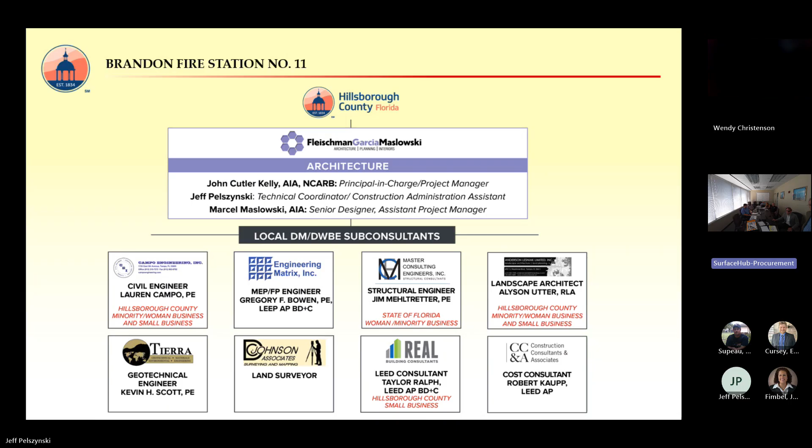You're already familiar with our project organizational chart. The key item on the chart is absolutely every firm on this chart has done fire station projects previously, so it's a highly experienced team. One thing that's a little bit unusual about us and sets us apart from other firms is we are currently celebrating the 25-year anniversary of our first fire station for Hillsborough County Fire Rescue, which is indeed fire station number 11 in Brandon. 2 of the firms that we work with on that job, our mechanical electrical engineer and our construction cost estimator, are also part of our team on this project.

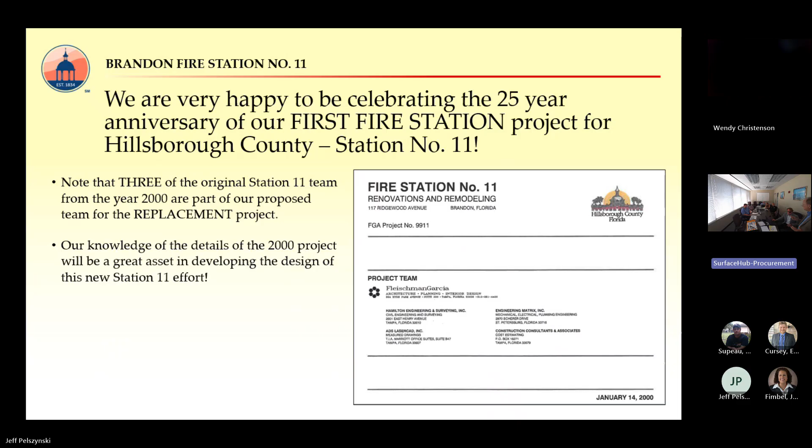And we feel very strongly that our knowledge of Fire Station 11 from that 25-year-old project has contributed greatly to our understanding of some of the issues you've got to address for the current project to be a success. First thoughts. Here are 3 key things that are going to drive the progress of the design and drive the cost of construction. Fire Station number 11 has to remain fully operational throughout the construction of a multi-million-dollar project on a constricted suburban site. We're going to present in detail how we think that can be achieved in a logical phased manner. The 3,360 square foot apparatus bays are to be retained and renovated.

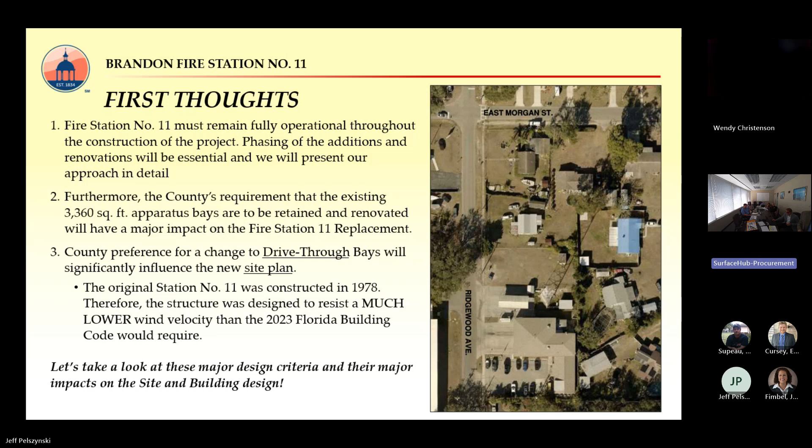Let's keep in mind they were designed in 1978 when the building codes were far less rigorous than they are right now. And the county has also expressed a preference for drive-through bays. Converting from back-in bays to drive-through bays will have a major impact on the site plan of the station. So let's take a look at these 3 major design criteria and see what we make of them. In 1978, the design wind velocity was probably 110 miles an hour. It's now 154 miles an hour under the Florida Building Code currently in effect.

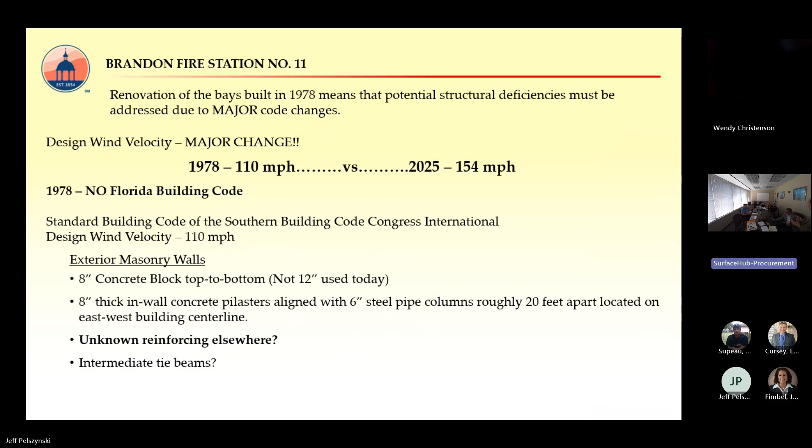The Standard Building Code of the Southern Building Code Congress is the one who set the 110 mile per hour criterion, and that would have determined how the masonry walls of the apparatus bays were constructed, how the roof was framed, and so forth. We don't know how those walls were reinforced. We don't know whether the 8-inch concrete block, we would use 12-inch today and always have in Hillsborough County, has been properly reinforced to take the wind load imposed by the much, much higher wind velocity.

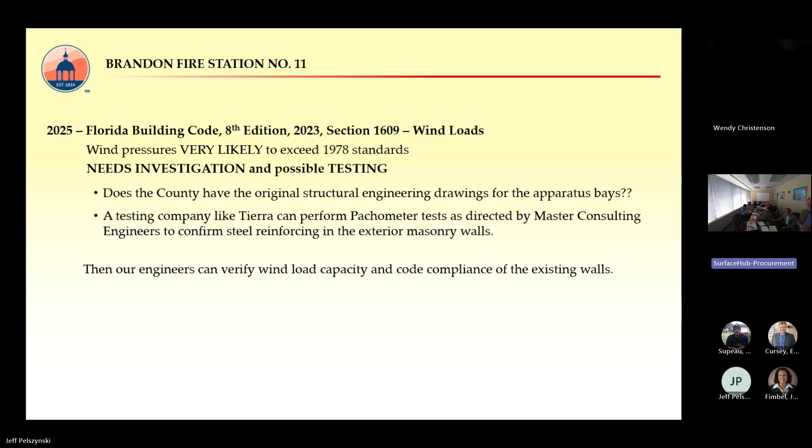The Florida Building Code and the implications for that wind speed increase have to be investigated. It would be wonderful if the county has the original structural engineering drawings for the building. I don't know if you do. Our project 25 years ago was essentially interior renovation and remodeling, fire sprinklering, adding a force main, getting rid of the leach field. Our testing company, our geotechnical firm, Tierra, can perform tests on those walls to see if there's proper reinforcing in them. We've got a lot of experience in hurricane hardening existing fire stations.

Some years ago, we did fire station hardening for 4 projects for Seminole Fire Rescue, and the one that was most similar in concept to yours was fire station number 31. It was built back in 1974. It was built using 8-inch thick concrete block walls that were unreinforced. Our structural engineers analyzed the wind pressures on the building and determined that major reinforcing of those walls would be essential.

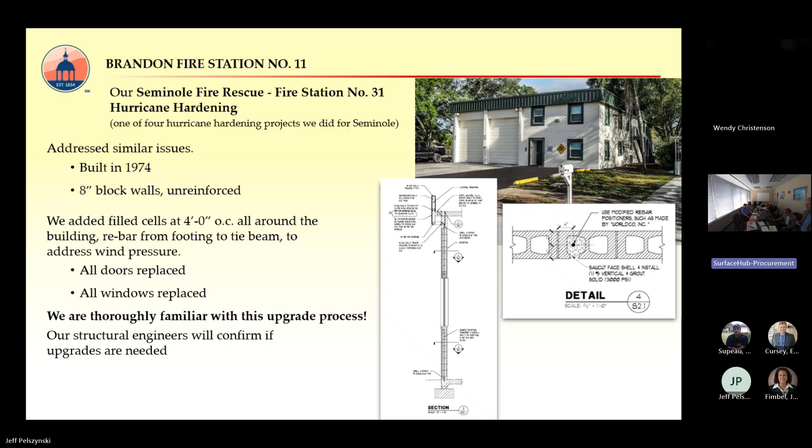What we did was we added filled cells at 48 inches on center all around the entire perimeter of the building. A number 5 bar was drilled into the foundation, ran all the way up the filled cell, and was drilled and epoxied into the tie beam. We cut slots into the concrete block, put the bars in place, and then filled the void with fine grout. We replaced all the doors and windows. So we're very familiar with the process that we think is pretty likely to be required if you keep that existing apparatus bay structure.

Another issue that we have to think about is the very unusual fact that this building was apparently originally built as a steel frame structure with steel bar joists and corrugated metal deck. And at some point in the life of the building, wood trusses were set down on top of the existing flat roof construction. An additional course of block was added on top of the existing concrete tie beam. And we don't know much about that block. We don't know if the blocks were filled solid. We don't know if they were doweled down into the concrete beam to hold them securely in place when they're subjected to wind load, or if they have simply been mortared in place, and we have no idea whether that existing beam would have been properly cleaned so that mortar would adhere and provide uplift resistance to the system.

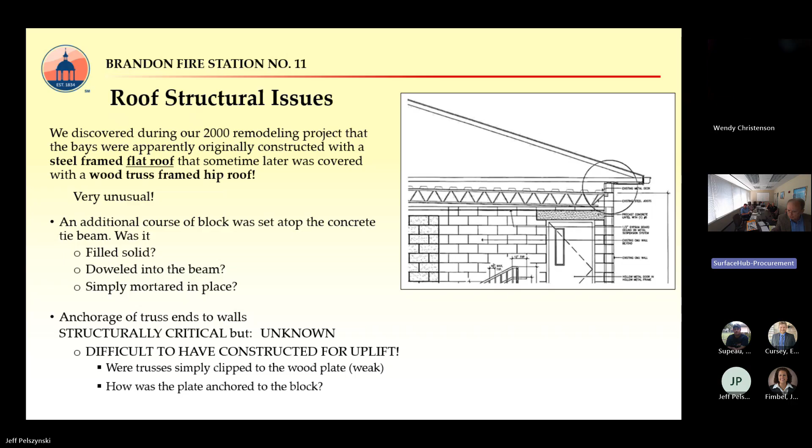The attachment of those trusses is extremely important in terms of the ability to resist wind uplift. We don't know if the trusses were simply clipped to that concrete block or to a 2x8 wood plate, perhaps. We don't know if the wood plate was properly secured down to the tie beam. Long story short, there's a big unknown right here in this unusual building, which has both a steel frame structure and a wood truss structure. And we need to be sure that it's all been properly attached and tied together so it doesn't blow apart if it's subject to hurricane wind forces. Our structural engineer needs to do an investigation of the conditions.

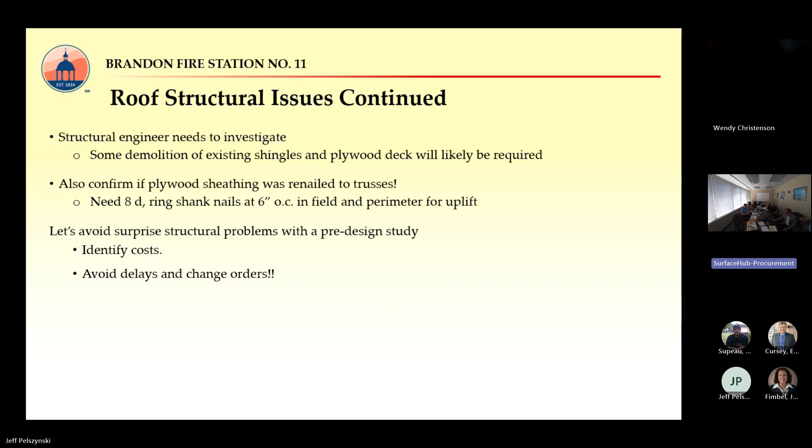We also don't know how the plywood deck was attached to the wood trusses. It should have been attached by taking 8-penny nails and nailing the deck to the trusses at 6 inches on center in the field of the roof and the perimeter. We have no idea what the nailing pattern was, but we need to be sure it meets that criteria. What we're saying is, let's avoid surprise structural problems with a pre-design study. Let's identify the scope and cost of all this work instead of being surprised by it once construction is underway. We want to avoid having to pay additional subcontractor labor and material costs, and we want to avoid paying extended general conditions costs for the construction manager if these problems are discovered once construction begins.

Change to drive-through bays. That's very, very significant. Station 11 is currently running, we believe, based on online information per fire.fandom.com, 3 pieces of apparatus: an E-One ALS engine, an E-One ladder, and an International Durastar rescue truck. 3 pieces of apparatus. Currently, they all back in off the adjoining street, Ridgewood Avenue.

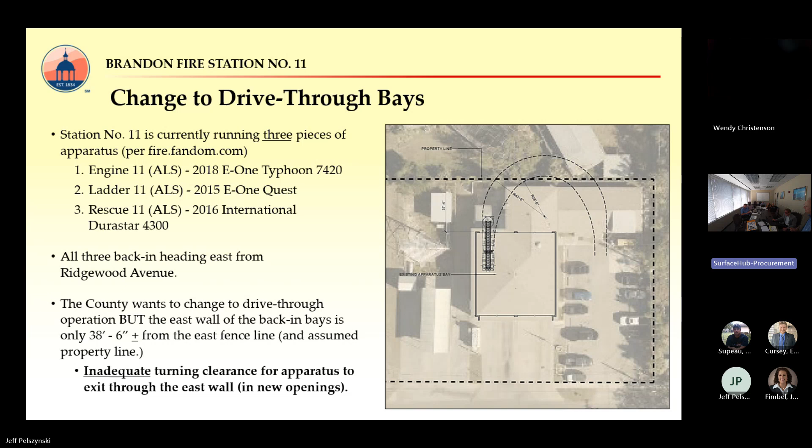If you want to have drive-through operation, the first thing we looked at is, well, we've got doors in the front, maybe with doors in the back, and you just pull in and turn around, but you can't. There's absolutely not enough room for the vehicles to have a proper turning radius and move out of the back of the building. The only way to get drive-through operation is to move in a north-south direction, either entering from the south or entering from the north. The distance between the back of the building and that property line is only 38 feet 6 inches, and that's nowhere near enough to achieve drive-through operation just by opening up the back of the building.

If we put 3 new doors in the north and south walls and access the bays from the north and south, there are 2 existing steel columns in the middle of those bays that hold up the steel frame that holds up the original steel deck, and we can position the apparatus nicely between the 3 bays created by the 2 columns. The newly acquired residential lots to the north make it possible for the apparatus to exit or arrive from north of the bays, and we'll show you a plan of this very soon.

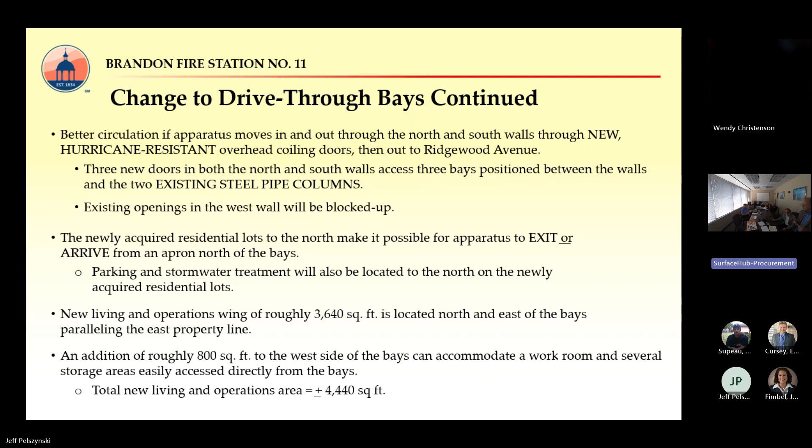Parking and stormwater treatment also located north of the building on the newly acquired residential lots. The new living and operations wing programmed at 4,440 square feet. We expect about 3,640 square feet to be located north and east of the bays, and then a small addition on the west side of the bays where we'll put bunker gear storage, general station storage, and so forth.

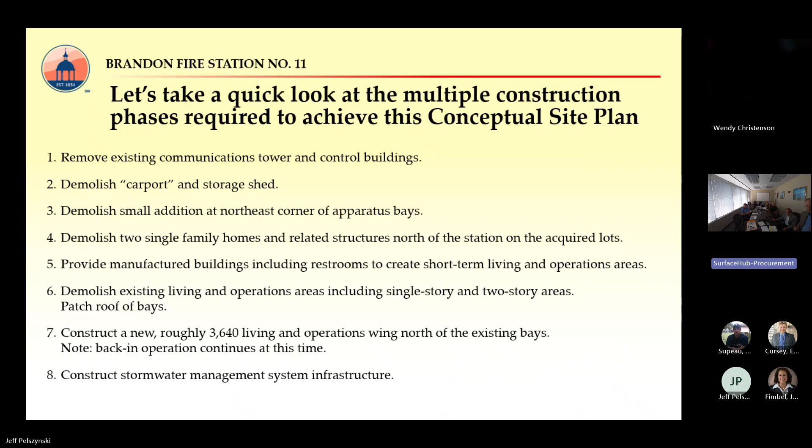And Jeff is going to show you how we get there in phases, absolutely necessary because the project will be completely occupied and functional throughout the construction. We've listed all the phases. You can see there's a lot of text up here. I'm not going to read all this to you. It's vastly more desirable for Jeff to show you graphically how we got to that plan we showed you in a series of steps.

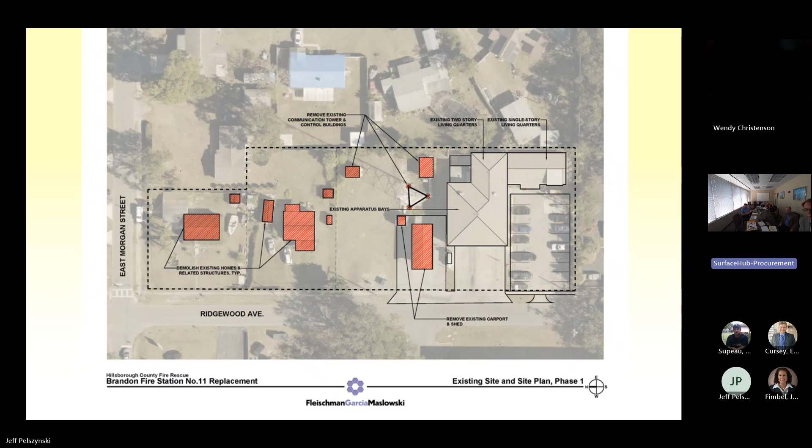So phase 1, we would start by demolishing the 2 existing residential buildings on the north end of the site, remove the communication tower and its 2 control buildings, and remove just the carport that's currently serving the fire station. We would leave the pavement that the carport is sitting on, however.

Phase 2, the CM would go ahead and set up his laydown area for storage of construction materials and parking and his trailer. This will be all the way to the north end of the site so we don't disrupt the ongoing operations of the fire station. We would also put a portable building in for the living quarters to act as a place for the firefighters to stay. And that would be on the existing paved area that we just vacated.

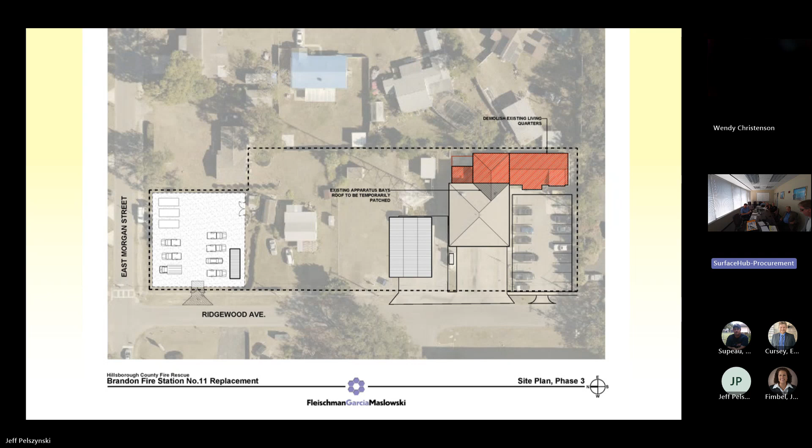Phase 3, we would go ahead and move the firefighters into the temporary quarters, demolish the existing living quarters. There's an unusual situation, though, with the 2nd-story roof of the existing living quarters that affects the roof of the apparatus bay that's going to stay in place and operational. So it would have to be patched pretty carefully so that the firefighters could still use the apparatus bay.

Phase 6, the firefighters are now operating their apparatus out of the temporary apparatus carport. We can remodel and do all the upgrades that John mentioned to the apparatus bay. Go ahead and build the aprons so that we can get the drive-through service in the apparatus bay. Phase 7, firefighters can begin operations in the new apparatus bay with the new aprons, a complete drive-through system. We can remove the temporary apparatus bay and the pavement it sits on.

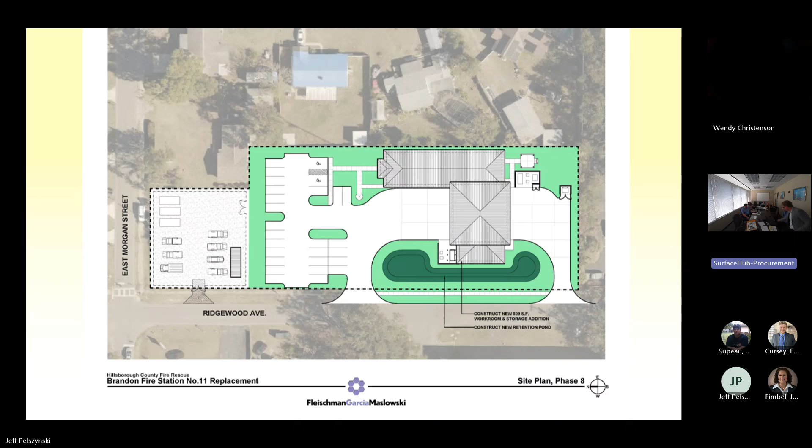Phase 8, now that this is all open, we can build the first of the 2 retention ponds, build the little storage area to the west side of the brand new apparatus bay. And finally, in the last phase, CM can remove his laydown area. We can finish up the site work, including the retention ponds to the north.

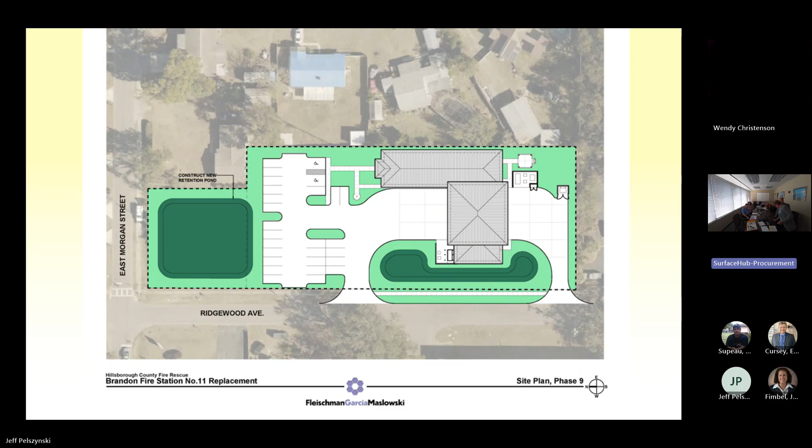Thank you, Jeff. Have a little bit over 2 minutes.

All right, why select Fleischman Garcia? As the architects for the year 2000 Fire Station No. 11 remodeling project, we're already very familiar with the critical characteristics and the challenges of the building and site. We feel strongly that no one knows the station's idiosyncrasies and potential problems better than we do. We're very comfortable designing using Hillsborough County's preferred architectural style, including Central Brandon Fire Station 45 that we completed 3 years ago, Ruskin Station number 17, which was a Firehouse Magazine award winner, and Riverview Station 16.

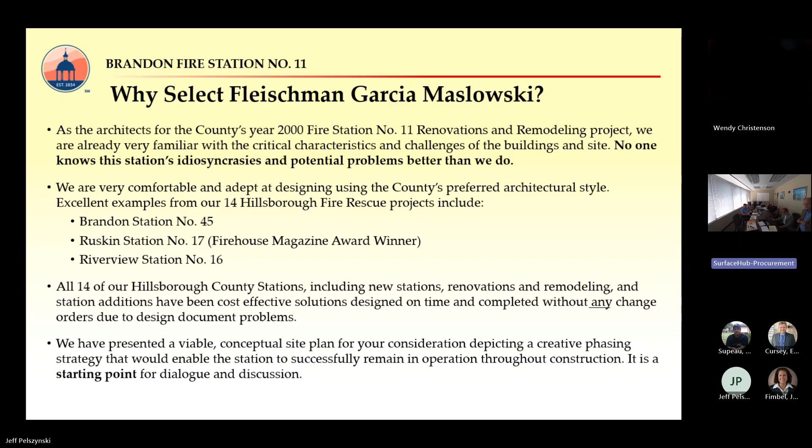All 14 of our Hillsborough County stations, including new stations, renovation, remodeling, and additions, have been cost-effective solutions. Every design milestone was met on time. All facilities were completed without a single change order arising from any errors or omissions in our plans or specifications. And we presented a viable conceptual site plan for your consideration, showing a phasing strategy that would actually allow this project to be constructed while the existing station remains in operation, intended to be, as I said, a starting point for dialogue and discussion, not a final design.

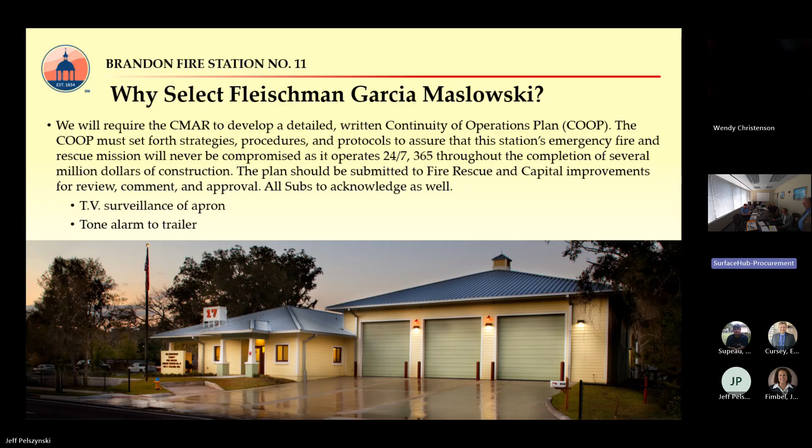And then we feel strongly that the construction manager needs to develop a very detailed written continuity of operations plan. Consider how many millions of dollars worth of work we're going to be putting on this site. We don't dare jeopardize the operation of emergency vehicles that are going to operate 24/7, 365. We think the plan should be submitted in writing to fire rescue and capital improvements for review and comment. We'd also like to see continuous television surveillance of the apron. And we think the fire station's tone alarm and annunciation system should be connected to the contractor's trailer so that whenever a truck leaves the property, everyone on the site knows it.

Lastly, specifying for value, controlling cost, always important. Even in construction manager jobs, where there's often a concern that we just handed this job to one firm, there goes the competition and there goes the pricing, every specification we write uses a concept we call specifying for value. It controls quality, it assures competitive market correct pricing, and achieves genuine construction value.

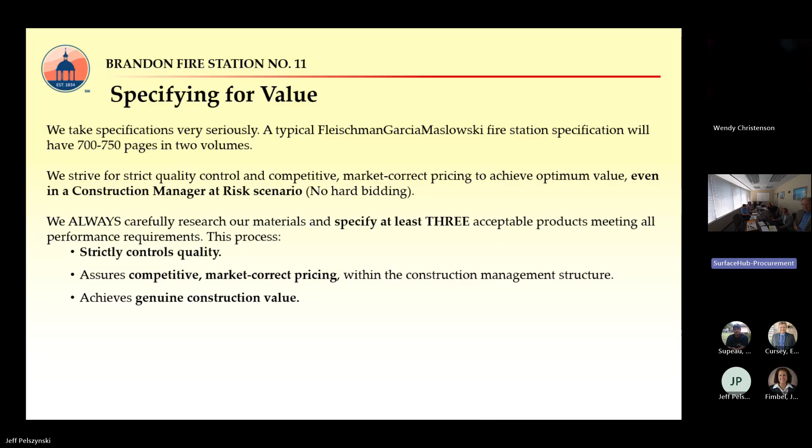Thank you. Okay. We'll move on to the question period. I'll start the timer again when you guys ask the first question. Thank you guys for that presentation.

I had a quick question about the apparatus bay. So if we have to go through all the efforts of doing the hardening because that was built so long ago, what do you see from a cost perspective of doing that hardening versus taking the apparatus bay away? I knew that question would come up. It's very difficult to answer without doing a detailed cost analysis of what a new building built from scratch, fully code compliant, would cost versus restoring and hardening the existing building. My honest gut feeling is there would probably be a small savings from renovating and remodeling the existing building, cutting in all that new reinforcing steel in the perimeter walls, properly tying down the trusses so they don't give it up in a hurricane. I think that would save a little bit of money.

I'm also aware that the existing bay structure is currently 55 feet wide inside to inside and 59 feet deep. And that is a small area for 3 contemporary firefighting vehicles. I'd love to see the building grow 5 to 10 feet in every direction, and there's room on the site to do it. But that's where we badly need fire rescue's input. We've never designed a fire station without talking to the fire chief, so at some point I hope we bring fire rescue in and get your thoughts on it. I'd say it's small savings. There are compromises because of its rather compact size, and only fire rescue can tell us how badly they'd like to fix it.